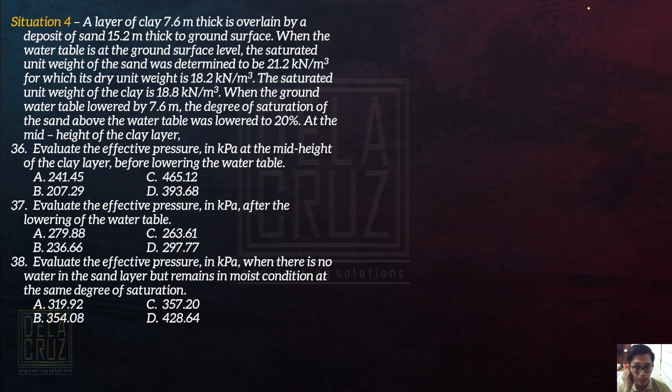Okay, let's have situation 4. Ito, ilang beses na itong lumabas sa board exam, no? Pansinin niyo yung mga previous videos natin. May ibang changes lang sa data, but yung situation is just the same.

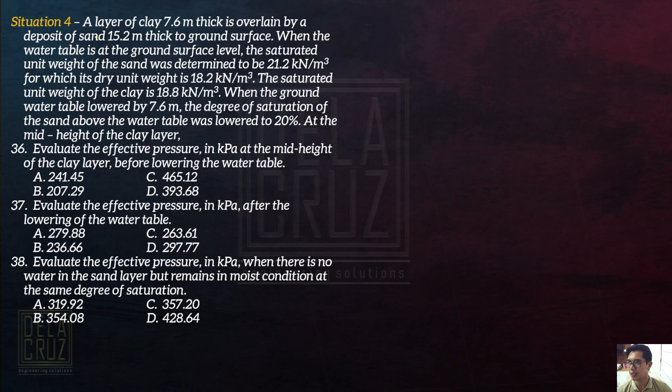A layer of clay, 7.6 meters thick, is overlain by a deposit of sand, which is 15.2 meters to the ground surface. So, ang clay natin is overlain or tinabunan ng sand. The clay layer is 7.6 and the sand layer is 15.2 meters. When the water table is at the ground surface level, the saturated unit weight of the sand was determined to be 21.2 kilonewton per cubic meter.

Saturated. Kung yung water level natin is nasa ground, for which its dry unit weight is 18.2. Ang dry unit weight naman ng sand is 18.2 kilonewton per cubic meter. While the saturated unit weight of the clay is 18.8 kilonewton per cubic meter. When the groundwater table is lowered by 7.6 meters, binabaan siya ng 7.6 meters, the degree of saturation of the sand above the water table was lowered to 20%.

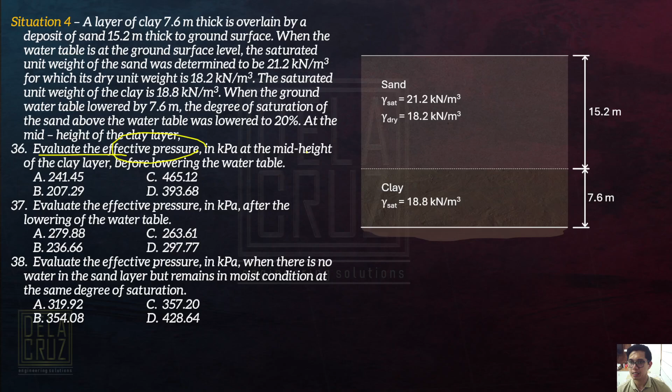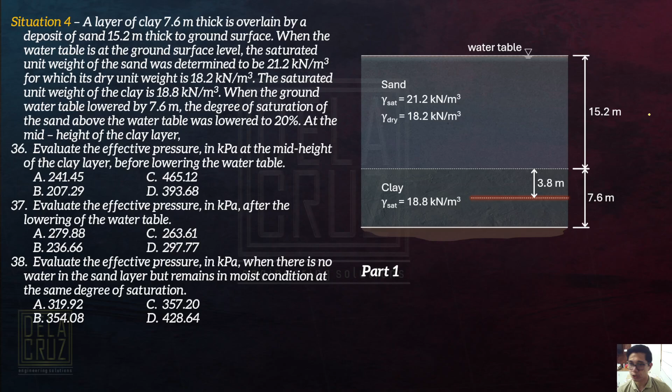At the mid-height of the clay layer, evaluate the effective pressure in kilopascal before lowering the water table. So, mid-height of the clay layer. Half of 7.6, that is 3.8. Okay, ang water table initially is at the ground surface. So, ang effective soil pressure natin at the mid-height is just the summation of gamma height.

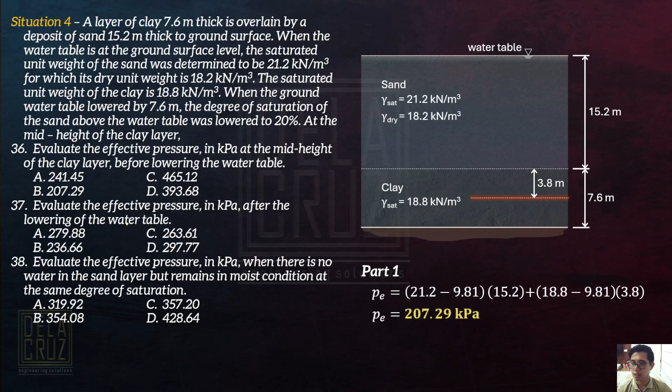Okay, starting at the top, saturated yung sand and clay for this condition, no? So, use the saturated unit weight, gamma minus water. Saturated gamma minus water. So, this is your effective unit weight multiplied by height, 15.2 up to this interface. Galing dito papunta dyan, gamma of saturated clay minus water, then times 3.8. So, 207.29 kilopascal.

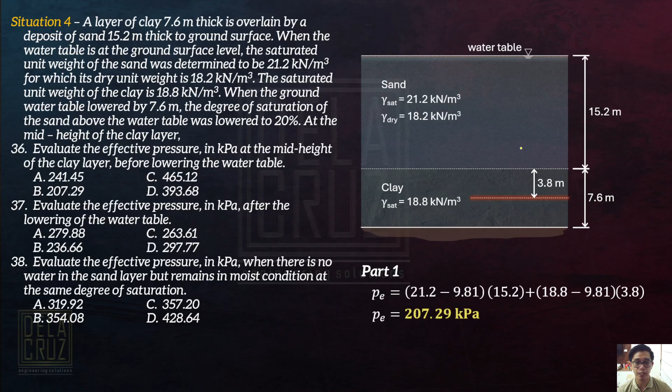Evaluate the effective pressure after lowering the water table. As sinabi sa problem, the groundwater table was lowered by 7.6, so binabaan ito ng 7.6. Dito yung water table natin. So 7.6 lang din to, 15.2 minus 7.6. The degree of saturation of the sand above the water table was lowered to 20%. So, we need to calculate the moist unit weight of this sand above the water table. Magagamit natin siya.

So, the general formula involving the saturation and the unit weight of the soil is ito. This shows that gamma is directly proportional to the saturation. That's why we can use linear, which is mode 3:2. Ang input natin sa X is the saturation, ang input natin sa Y is the unit weight. Ang two known points dito is the dry and the saturated unit weight. When the sand has a saturation of 0, the unit weight is the dry unit weight, 18.2. When the saturation is 1 or 100%, the unit weight is the saturated unit weight, 21.2.

So after that, i-input mo yan. Gamma moist is equal to, when the saturation is 20% or 0.2, y hat. Nasa OPTN 8 po yan, regression. So ito yung makukuha natin. After that, we can solve for the effective soil pressure at this interface, summation of gamma height. Since yung sand above the water table is not saturated anymore, hindi mo na isasubtract ang unit weight ng water. So, it is gamma moist 18.8 times 7.6. Kasi hindi siya basa, hindi siya saturated.

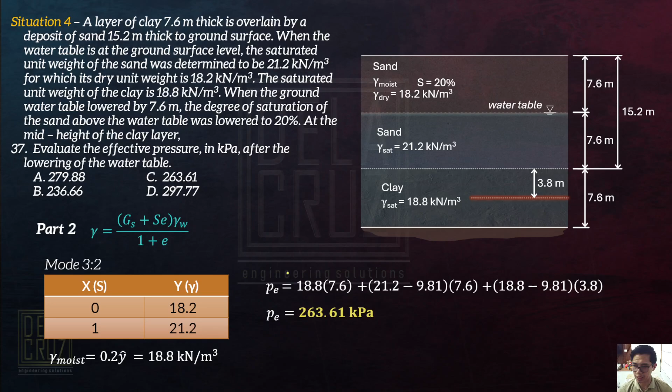Baka may tanong kayo, paano yan imano-mano, sir? You're just using calculator technique. Pakitaan ko lang ng mabilisan. Kung imano-manohin natin using this formula, I will distribute this one. GS gamma water over 1 plus e. Then you have Se over 1 plus e gamma water. So, Se gamma water.

Now, this term is the dry unit weight. GS gamma water over 1 plus e is dry unit weight. While dito, e gamma water over 1 plus e is a constant, hindi yan magbabago sa soil natin, as long as hindi siya compacted. So, iset ko lang siya as constant K. Therefore, ang gamma ng soil natin at any moisture is equal to gamma dry plus S times K. Ang saturation hindi constant.

So, rearranging, ang constant K is the gamma of the soil at any moisture minus gamma dry, over S. Pwede nating tanggalin ang gamma water kasi it is included dito sa constant. So, over S na lang. That's the K. Therefore, you can just do proportion.

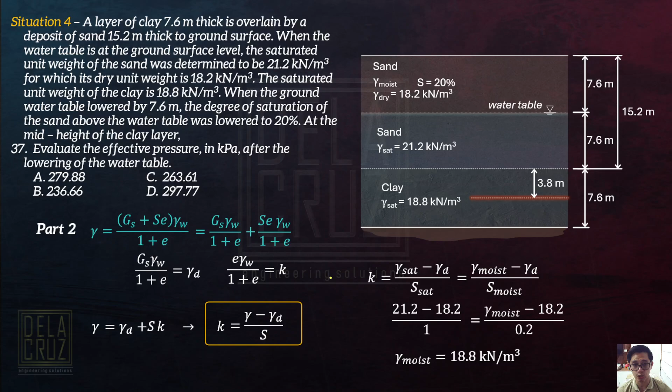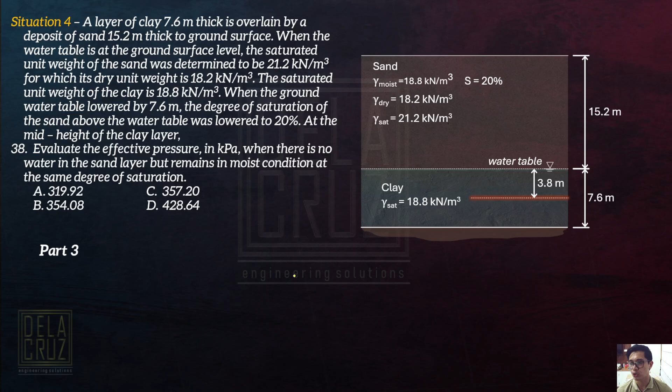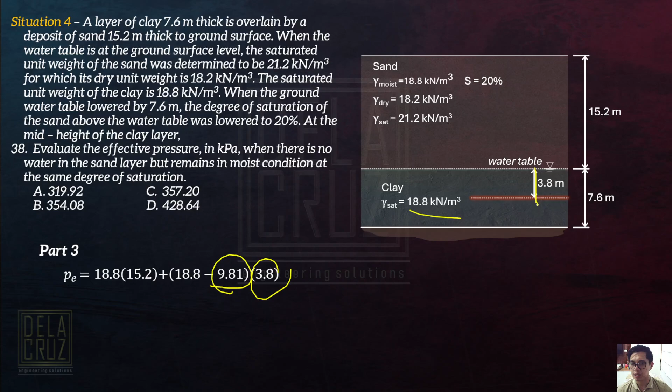Anyway, pangatlo, evaluate the effective pressure when there is no water in the sand. Wala na talagang tubig ang sand, dito na lang sa clay layer, but the sand layer remains in moist condition at the same saturation. So, 18.8 kilonewton per cubic meter yung ating moist unit weight. Hindi na to basa, so 18.8 times 15.2, plus basa pa rin yung clay, 18.8 minus gamma water times 3.8. So, 319.92 kilopascals.